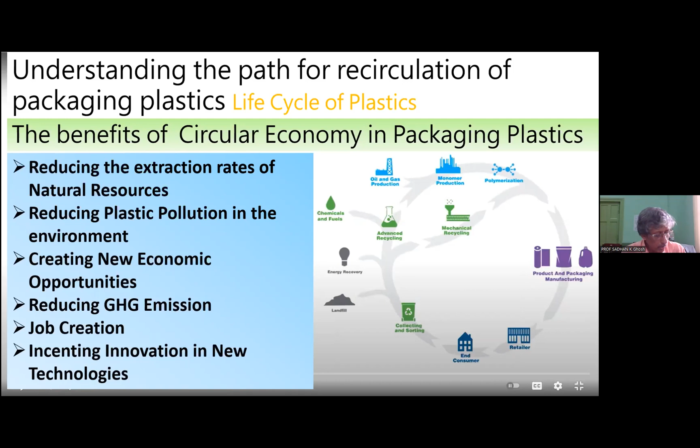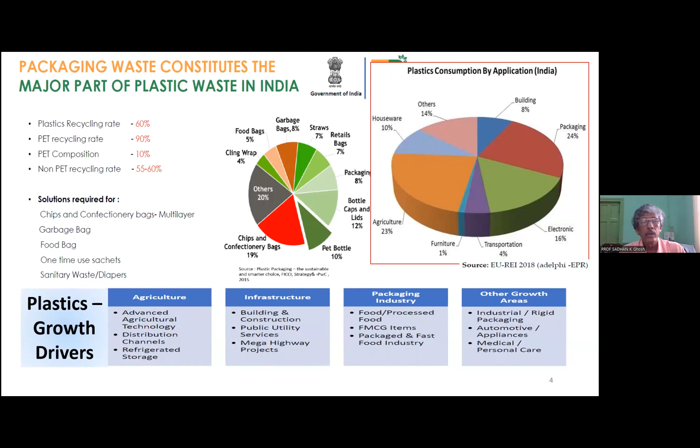But there are a number of solutions which are now taken into practice. And I'll go to some of the technology on which the circular economy is based. I'm not going into the detail of this. This is just a consumption pattern. So plastic is everywhere, and everywhere the packaging plastic is also creating problems because of our habit, because of our culture.

It will identify the materials whose life cycle is longer, conserve all the resources, including energy and material, and ultimately, the disposable material at the end of the life cycle of a particular product acts as a secondary raw material for a second process. Whenever it acts as a secondary raw material, it creates value in the value chain. It is creating product, it is creating economy, and it gives a lot of scope for employment generation, as well as helping environmental sustainability.

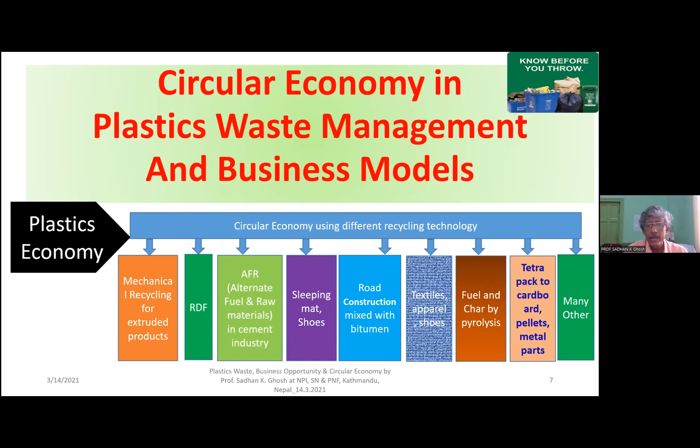Then there are a lot of processes by which we can make sleeping mats, shoes, and many other materials. Road construction, Mr. CRC Mohanty has already referred to. Textile, apparel, shoes, fuel and char by pyrolysis, Tetra Pak to different pellets, and many other processes. This is one process which converts non-recyclable waste into energy, sustainable chemicals, solvent coatings, fuels, and many other things, including methanol and syngas.

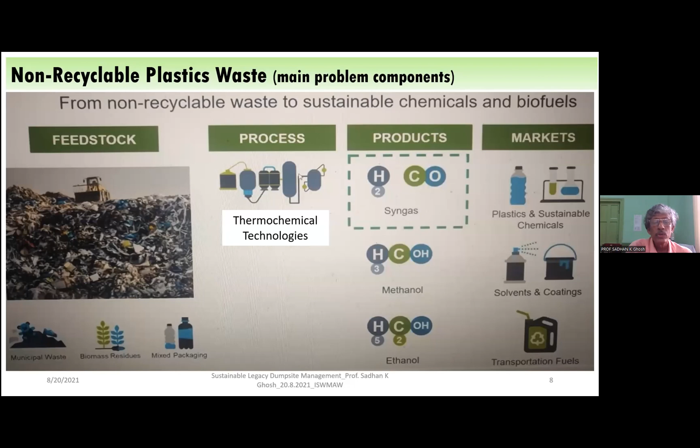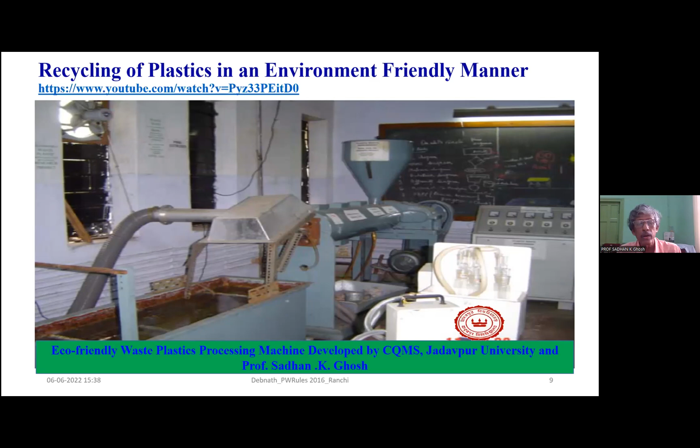So this is another machine. This is an extrusion machine, pyrolysis, plastic extrusion. In fact, this machine was developed by me in 2004, and it is patented. And it is now used in many places. This is an eco-friendly waste plastic processing machine, which takes all the waste packaging plastics and produces beads, and all the gases which are produced here are also converted. So this is the process.

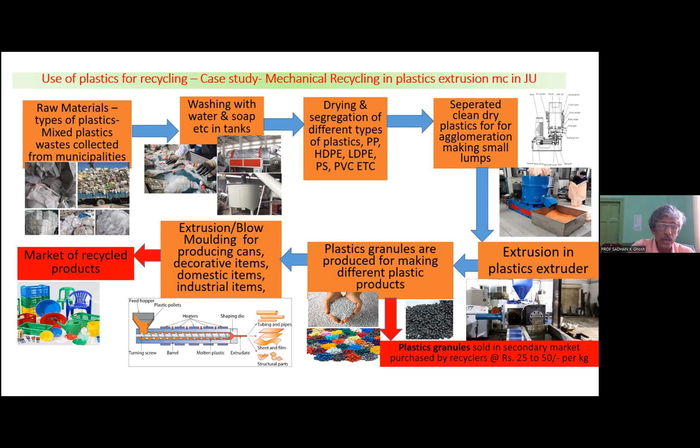I don't have much time to elaborate, but this is the process by which the material is ultimately made into this type of product, which again is used for making different types of end products. These are all marketable products. Even the virgin granules and this waste plastic granules have competitive pricing. In many places, 20%, 30%, 10% of waste plastic beads are used with virgin plastic for reducing the cost of the product.

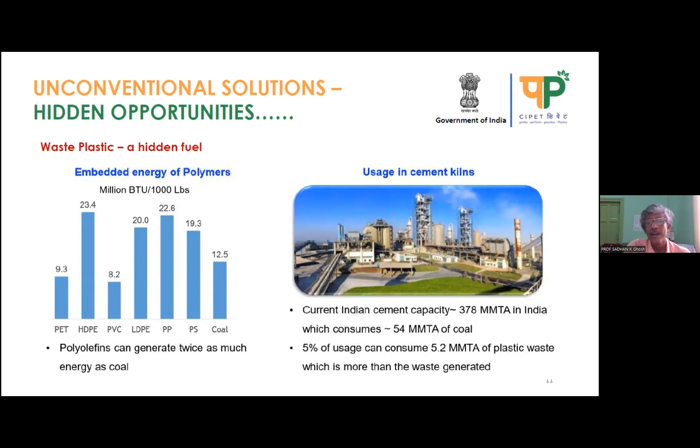This is again the usage in cement plants, the co-processing. The Government of India has taken action that all cement plants will now use plastic and also inert wastes which have a little calorific value. We are still preparing a business model. Of course, there are 60 odd cement plants which are now utilizing this waste for cement kiln utilization, and ultimately they are producing cement, which has a very good market.

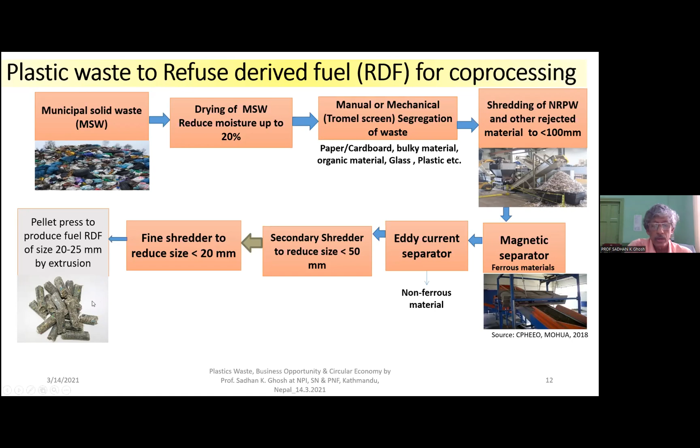Then there is plastic refuse derived fuel, RDF, where plastics are converted into pellets which are again used in a boiler or any other furnace. This has a calorific value of 2,500 to 4,500, comparable to coal and other fuels. Nowadays, the cost of this waste due to RDF production is increasing day by day. These are all very positive developments in the utilization of packaging plastics.

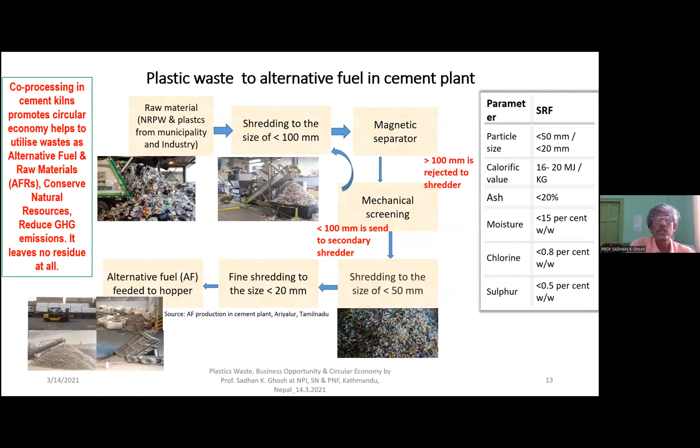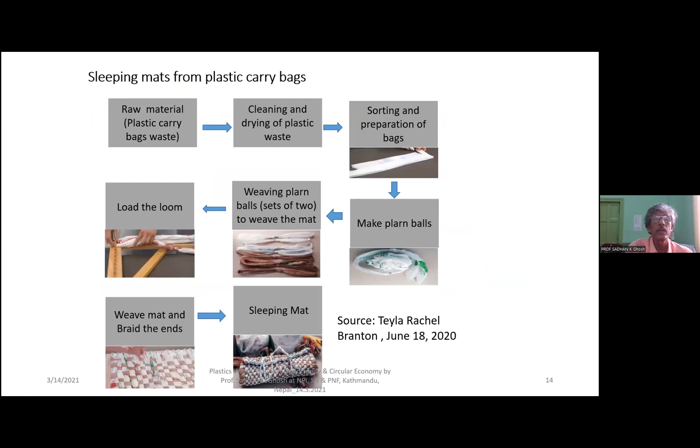As I referred, the cement plant, and this is a sleeping mat. There is a good business in India as well as Thailand for conversion of plastic into sleeping mats, and also different types of dresses and textile products, which are even used in world football or cricket. I remember in 2017, all the players wore this converted textile product as a dress, which was produced as a part from packaging plastic material.

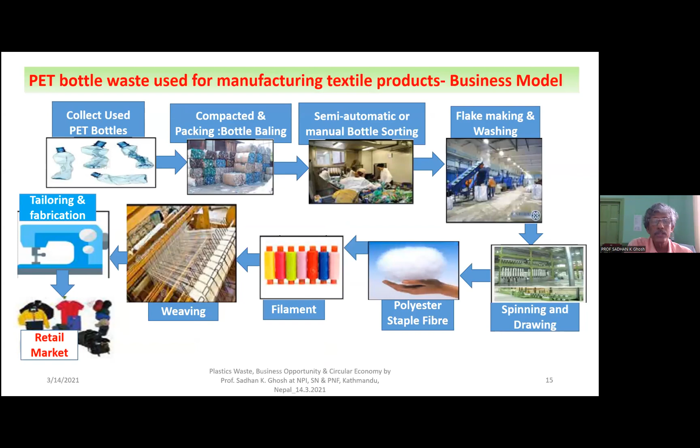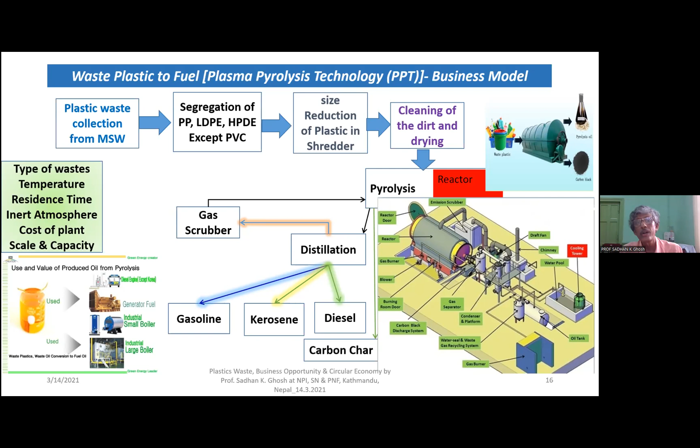So these are some of the very important technologies for utilization of packaging plastics, converting them into usable products, and promoting the circular economy. The circular economy is a very important initiative and concept for utilization of packaging plastics, as well as reducing the problem of disposal of packaging plastics as a post-consumer material.

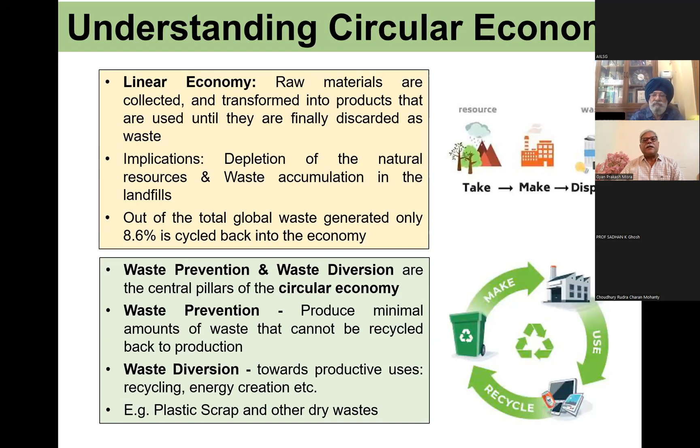Now when we talk of beverage packaging, what is beverage packaging? It is used for a wide range of products such as bottled water, beer, coffee, soft drinks, dairy products, energy drinks, juice, sports drinks, tea, wine, spirits, etc. The requirement of packaging for beverages depends on the required shelf life of the package of the beverage that it is going to contain.

Then there are marketing requirements. Everyone wants their product to be visible in the store, so that when the customer is coming to buy, the product is distinctly visible, and then the customer is prompted to buy that product. So this requirement I term as the marketing requirement. There are also customer needs, application, and safety during transportation, etc. These are a few factors you bear in mind when you decide what kind of packaging material should be used for a particular type of beverage.

Now, talking of marketing requirement, although it was not part of the topic, the government observed that producers of various items were being irresponsible and greedy while designing packaging material for their products. To curb this tendency, the government came out with extended producer responsibility. So in some way, I feel the circular economy concept we are discussing, and extended producer responsibility, are also interlinked.

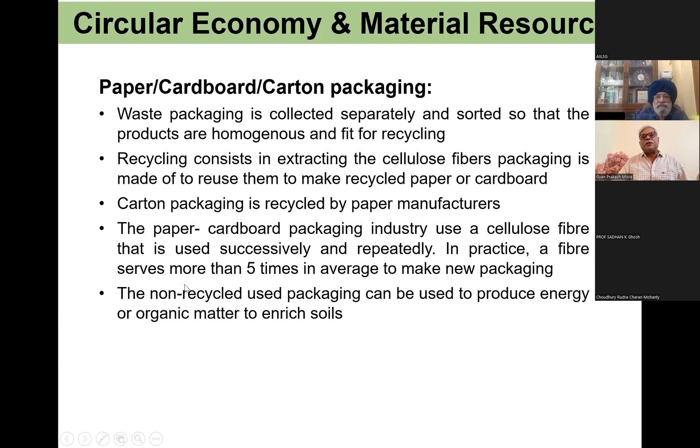For the plastic packaging, I think a lot of technicalities have been covered in the previous presentation, but broadly, to understand, the matter produced by recycled waste meets precise technical specifications to be integrated into new products, including packaging. Plastic producers, packaging manufacturers, packaged products marketers, collectors, and recyclers have been committing for more than 20 years to develop recycling altogether. You can take example of PET bottle.

Over a period of time, take example of mineral water bottles. There has been considerable reduction over time in the weight of the bottle and its cap. Somebody was mentioning to me that it used to be 40 grams per bottle, which has now been reduced to 28 grams per bottle. So this also contributes to your resource management.

Bottles can be made out of PET. PET is a material, as you know. Its environmental impact was reduced by more than 20% in the last 20 years. So constantly these researchers have been making a lot of improvement in these areas. The recycled PET can also be used, wherein 25% on average in bottles containing recycled material. Or you can use biosourced PET, wherein 30% of it is produced with sugarcane. So these are the various methods of dealing with what has been done with respect to the PET bottles.

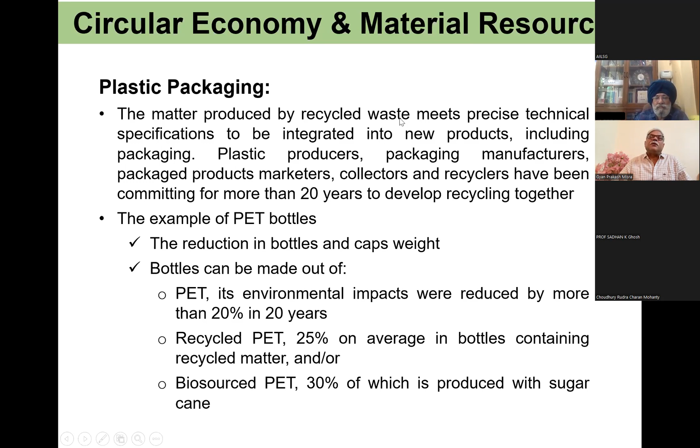Now I will show you a film which will talk about the life cycle of packaging carton. So can you go to the next? Yeah, can you click on the link, please?

In Hong Kong, carton drinks are a part of many people's daily lives, and most people will simply throw away the empty carton after finishing the drink. The production of a carton actually involves a number of stages before it reaches us. We can all play a part in extending its lifespan by recycling, which will help support sustainable development for our society. So how does it work?

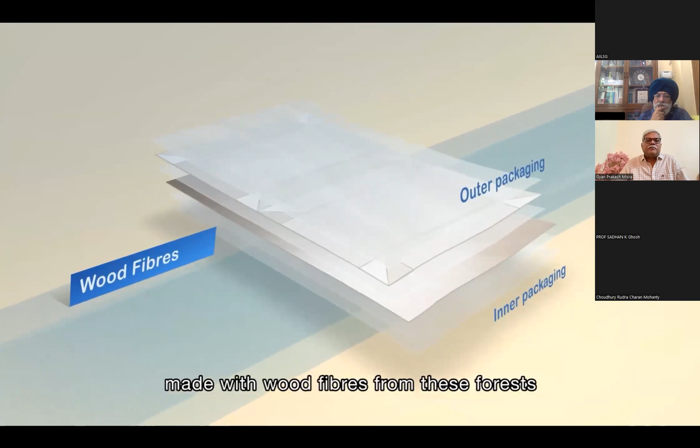Timber from forests that are FSC certified is made into all sorts of products. Tetra Pak, the world's largest beverage carton company, produces cartons using recyclable cardboard made with wood fibers from these forests and laminated with plastic and aluminium. This type of packaging can protect the product from light, air, and dirt.

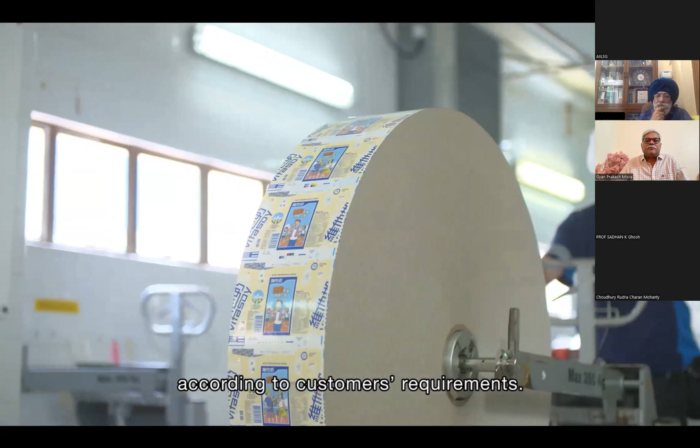Carton suppliers print packaging graphics onto paper rolls according to customers' requirements. These paper rolls are then delivered to customers such as beverage manufacturer Vitasoy. From sourcing raw materials to product formulation and production, beverage manufacturers would adopt the 4R principles to help reduce environmental impacts. The 4Rs are renewing, reducing, recycling, and responsibility.

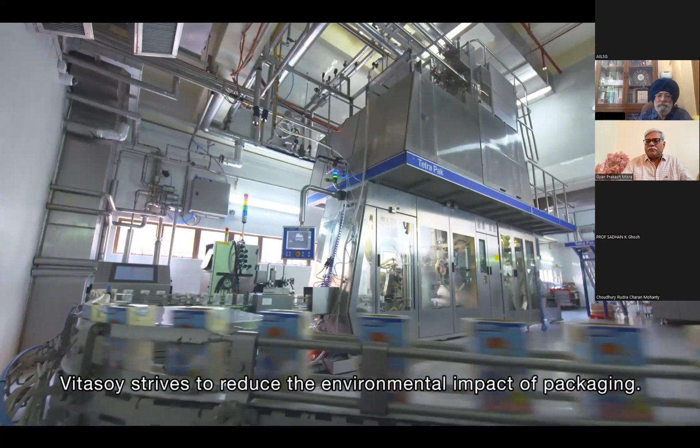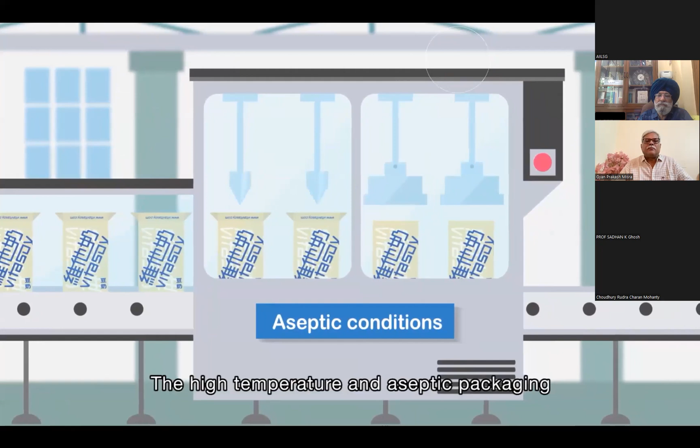Vitasoy strives to reduce the environmental impact of packaging. As mentioned just now, the company has been using cartons made with wood fibers from sustainably managed forests. Vitasoy's products, sterilized in high temperatures for a short time to kill bacteria, are then poured into cartons under aseptic conditions. The high temperature and aseptic packaging protect the product quality and enable a longer shelf life without having to use preservatives.

As consumers, we can help protect the environment after finishing carton drinks by supporting waste carton collection and increasing its recycling value. Here's how we can help. First of all, remove the straw and its sleeve. Then cut a corner off the pack and rinse it well to make sure it's clean. Finally, compress it and put it into a recycle bin specifically for carton collection.

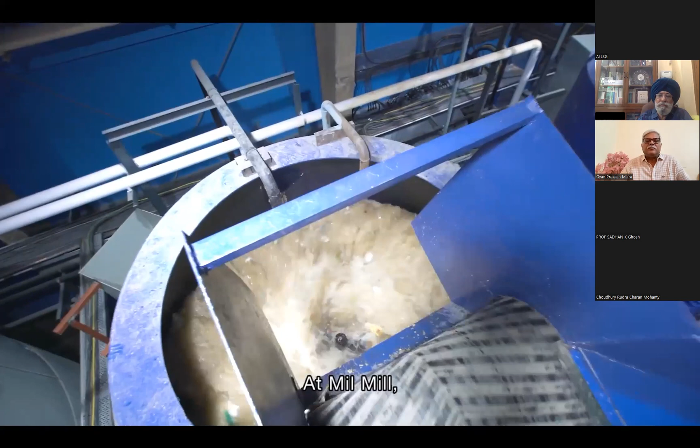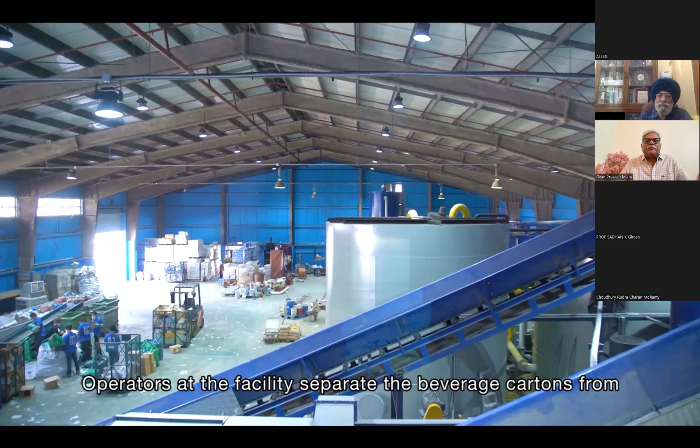The collected cartons will be transported to Mil Mill Recycling Site, Hong Kong's first facility for recycling waste cartons. At Mil Mill, the paper in the waste carton is separated from aluminium and plastic using a hydropulping process. Operators at the facility separate the beverage cartons from other unwanted materials to enhance the quality of the paper pulp.

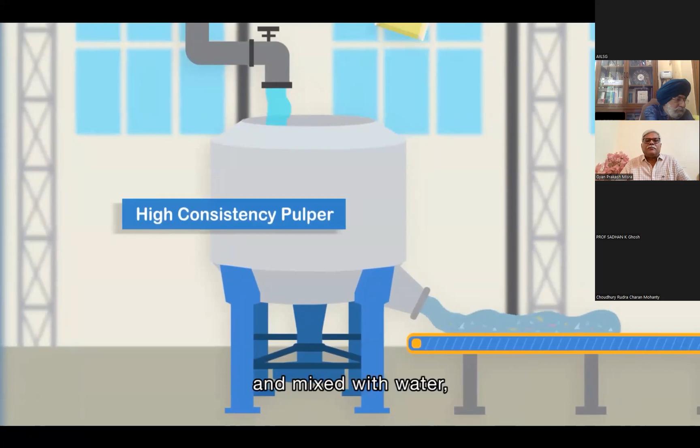Cartons are placed in the high consistency pulper and mixed with water, then passed through a rotary drum to siphon off the carton's aluminium and plastic. The residual impurities are then removed by a separator to produce the paper pulp.

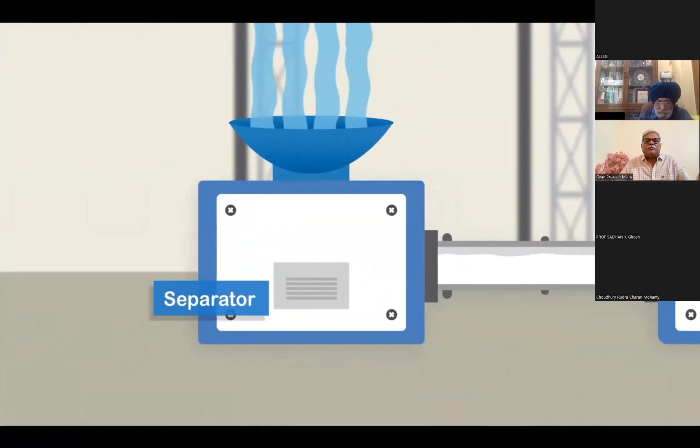We can all help to extend the lifespan of a beverage carton by supporting clean recycling. By doing so, we ensure it can be recycled and help to enhance the value of used cartons. Together, we can play our part in reducing the environmental impact to our planet and enhancing its sustainable development.

Thank you, Dr. Singh, and over to you. Thank you very much, Misra ji. It was wonderful, and I think there are a lot of things to learn. Your video really indicated how better we can collect the used cartons and perhaps increase the percentage share, which at this moment is not even 50% in India, to collect them so that we can really increase that. It was really excellent and we are really thankful. I'm sure that the participants will really benefit from what you have presented and shared. Thank you very much indeed.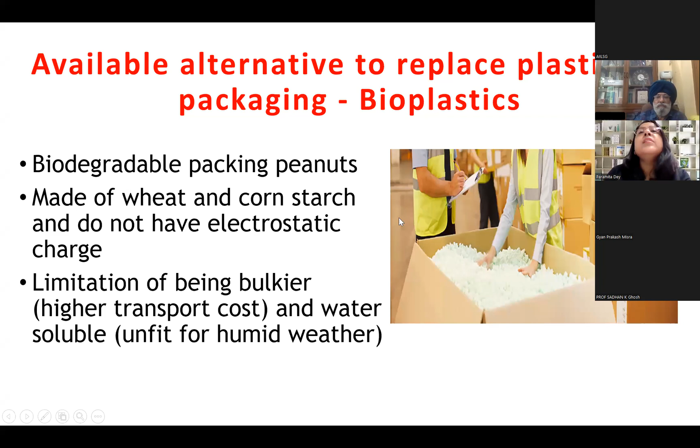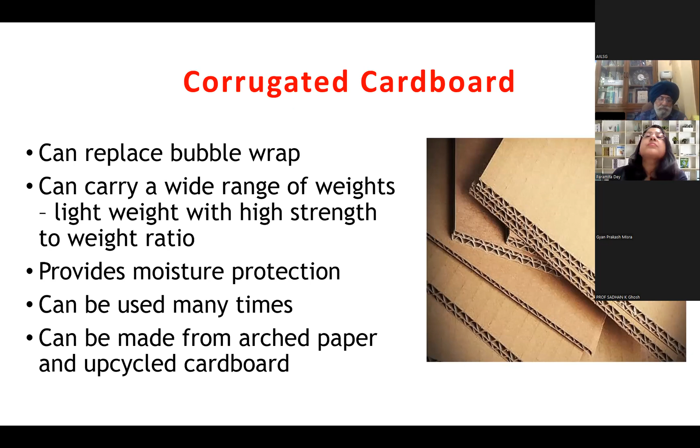Next, please. Corrugated cardboard is another option, but again, there's only a certain number of cycles that it can undergo, but of course it can be upcycled, and it is lightweight with a high strength to weight ratio. Next, please. Another example is that of air pillows made from recycled material. Again, this can be recycled. It has a little bit of plastic, but it is very environmentally friendly compared to many other options. The other option is that, next please,

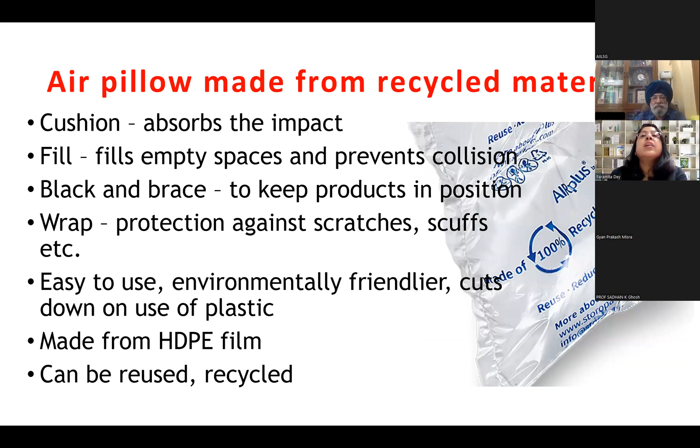And it's also an example of industrial symbiosis, where the waste of one industry is becoming the raw material of another industry. So this has a lot of opportunities going forward, but of course, a lot of research needs to be done in terms of upscaling this whole thing, because farming also requires a lot of land. Next, please.

The next one is seaweed packaging. Seaweed is a complex alga, and there are small scale efforts which are being researched for packaging of dry food products. And it is also ensuring green jobs and entrepreneurship at a small scale, in terms of small scale industries. But one can think of doing these options depending on the kind of products we are looking at. Organic fiber is another option that we have all seen, and in India it is widely used. Next, please.

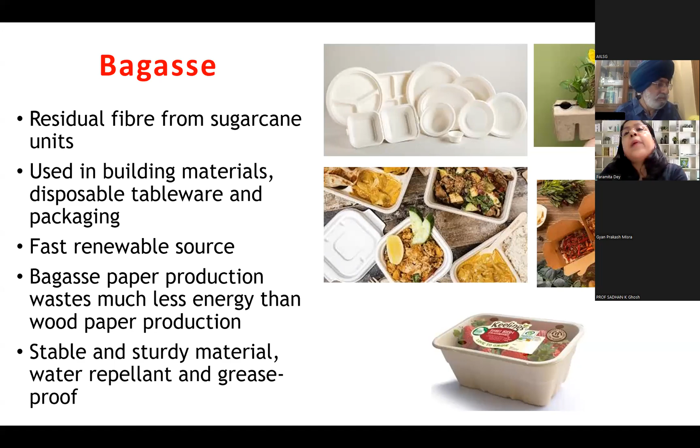Bagasse is a very promising material because a lot of sugarcane is produced, and it's a stable and sturdy material. It's water resistant, water repellent, and it's also grease proof. And it is being used to make a lot of other things; it is being used very widely to package food products. Next, please.

Stone paper is again an example of industrial symbiosis. It's made of calcium carbonate, where HDPE plastic is being used with 80% of stone, which is basically lime powder, and it's a waste from the quarries. And India has a lot of such quarries. And here it is used for making paper bags, takeaway food cartons, Ziploc bags, and things like these. Next, please.

Palm leaf is again biodegradable, very environmentally friendly, but it has its limitations in terms of the kind of products it can be packaged in. Next, please. So these are some of the options that are being researched upon, that are being looked at.

So as a conclusion, I would like to say that packaging is necessary, and recycling of packaging material is a very important recovery route. But there are some practical limitations to recycling. Paper fiber deteriorates each time it is recycled, so the realistic life of a paper is around 5 to 7 cycles. Some materials such as cement sacks require only virgin fiber to get the required strength.

Recycled polymers lose their properties each time they're recycled. Glass can be infinitely recycled, but the colored ones cannot be used to make clear bottles. Metals also have the capacity of being recycled infinitely. So the most practical thing to do is to optimize the recycled content and support the development of new and innovative materials. We all know the advantages of plastic.

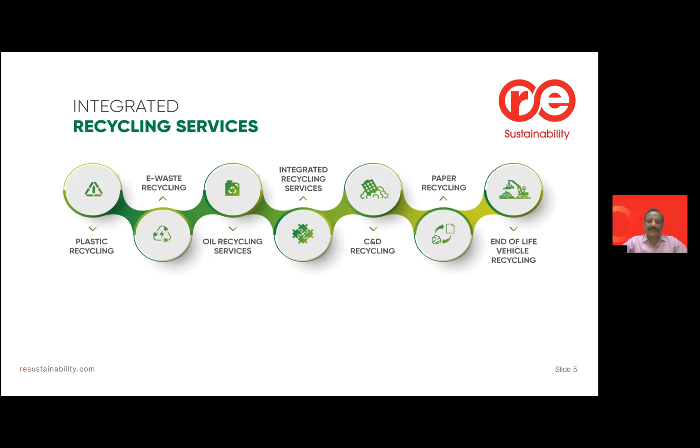The focus is completely on how we can together come out with a circular economy, so that everything which is brought out from nature can be given back to nature with minimal going to waste. Next. It is working with a closed loop. We provide and handle right from collection, the collection of the segregated material in the way it should be, so that there is the minimum requirement of any further resource, whether it is manpower or any other material resource. It depends upon how best it is collected, how best it is processed, and post-processing how the material can be supplied back as various different products, in line with the different regulations. Next.

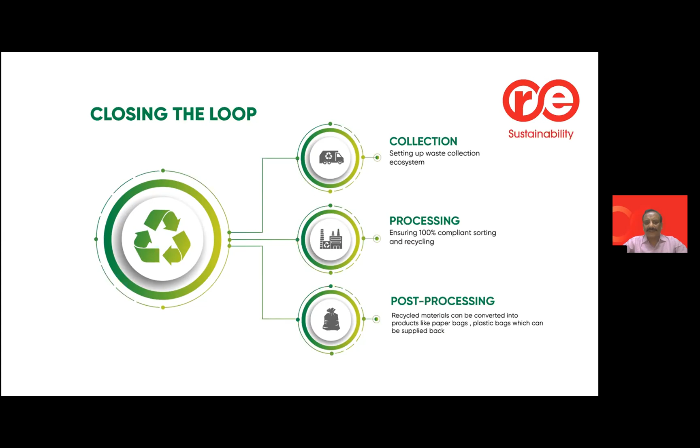So from the municipal solid waste, it is collected from households for door-to-door collection, and it goes to the material recovery facility. At the material recovery facility, the various types of waste, whether it is plastic, paper, metals, or wood, gets segregated into different fractions where they go for different value addition, whether in the form of recycled paper, plastic granules, recycled metal, or recycled wood.

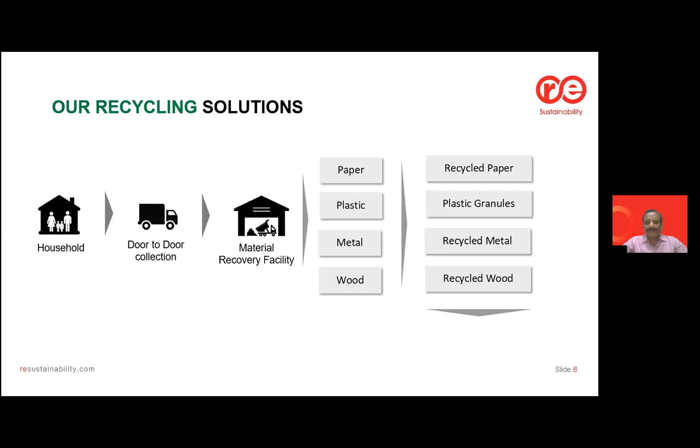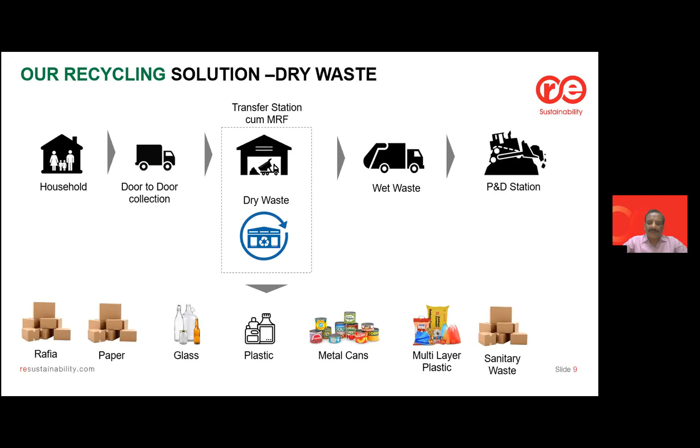Upon the paper waste, to be very precise, it goes through collection from different generators, transportation to the baling facility, and from the baling facility, it goes to different recycling options, recycling treatment plants.

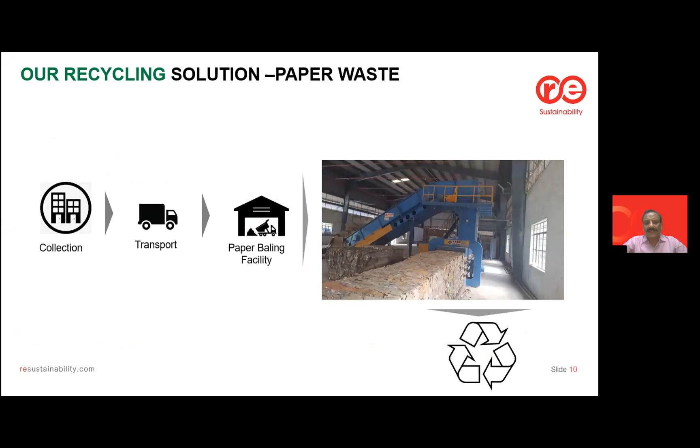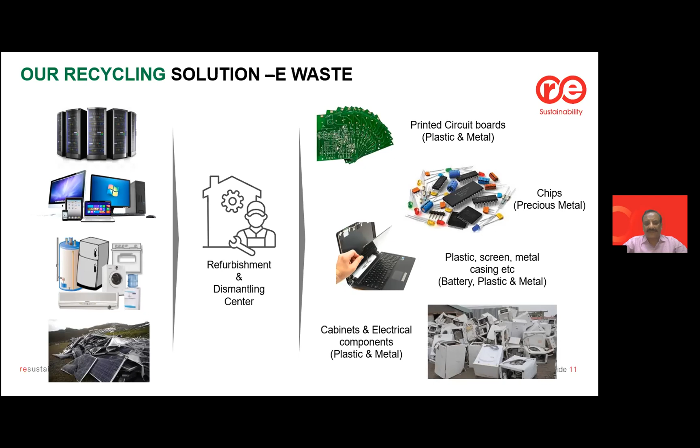Similar is the case for e-waste. I will not go into too much detail, but these are the infrastructures being provided, right from refurbishing to dismantling centers. I would also like to tell this august audience that India is going to have the third largest recycling facility for e-waste, apart from Belgium and China. We are going to have it in Hyderabad, and the plant is under 70% construction. Hopefully by next June, or World Environment Day, we will be in a position to run that e-waste recycling facility, which is a metal recovery or material recovery facility, for precious metal recovery.

For plastic waste, it goes from the MRF - certain waste plastics, which my senior colleague Mr. Gyan Prakash was talking about, goes to the waste-to-energy plant, from where clean energy can be produced, and bottom ash treatment can go to recovery through tiles. Again, through pyrolysis, certain gas can come up, and other things like recovery of plastic granules can go to manufacturing of other plastic material.

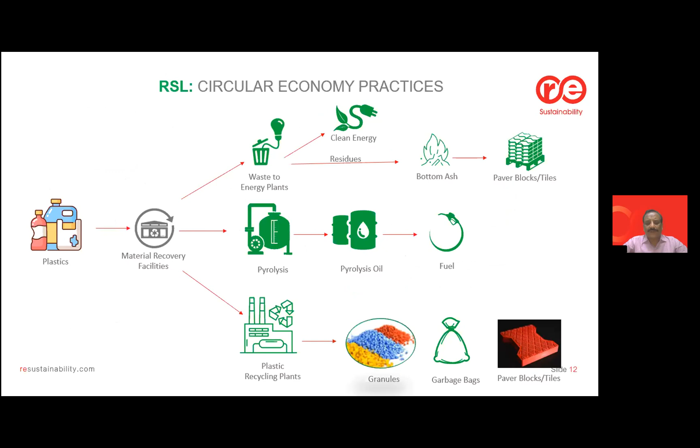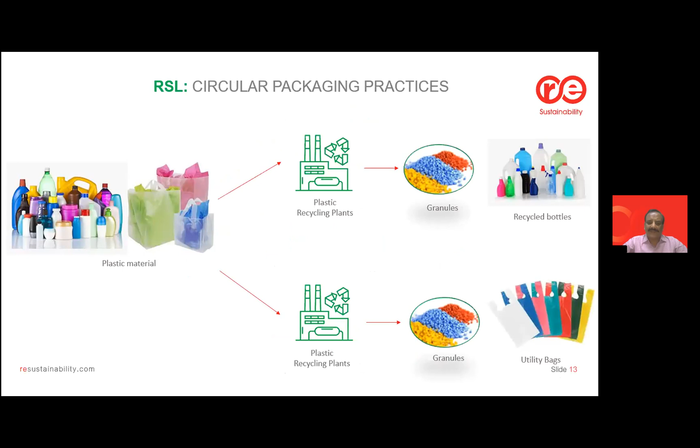Packaging material goes to plastic recycling plants in the form of granules, either coming up through recycled bottles, or we are manufacturing utility bags. These utility bags are also being given back to the generators of municipal solid waste, or even to biomedical waste, where the waste is getting segregated. And this is all happening within our country, within our facilities at Hyderabad.

We are also launching, and putting into practice - without technology, things cannot come up. So it's called Reloop, a digital platform wherein every material entering your facility gets tracked: where it goes, how it gets processed, what value addition it has, and how it gets back to the market, all tracked through this technological intervention, now called Reloop.

It tracks everything, right from collection, handling, weighment, segregation, decontamination, processing, and value addition. Every product, at every level, is tracked through a specific barcode, getting updated to the tab, and through the tab it goes to senior management to see how the material, whether it is the material receipt at the site, is returned back in a proper manner - not just to say that it should go anywhere. So it is not only in the form of environment regulations, but also in terms of value addition, whether the loop is getting closed or not.

All are QR code based and tracked and traced at every level. I've already explained this.

World-class infrastructure is available in India. What we see in other countries is equivalent to what we have in India, whether it is treatment facilities, monitoring and command control centers, or plastic recycling facilities. Every product is being tracked, every product is being traced, and what kind of consumption of electricity and water, and what kind of products or byproducts are coming, whether the material coming out as effluent is being treated or not - each and everything is being tracked and converted into useful material.

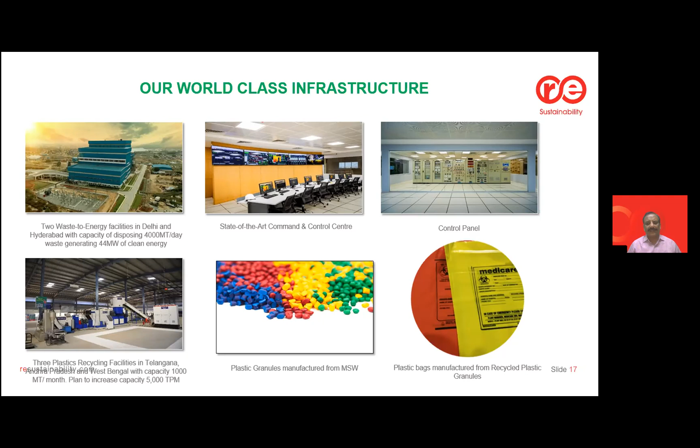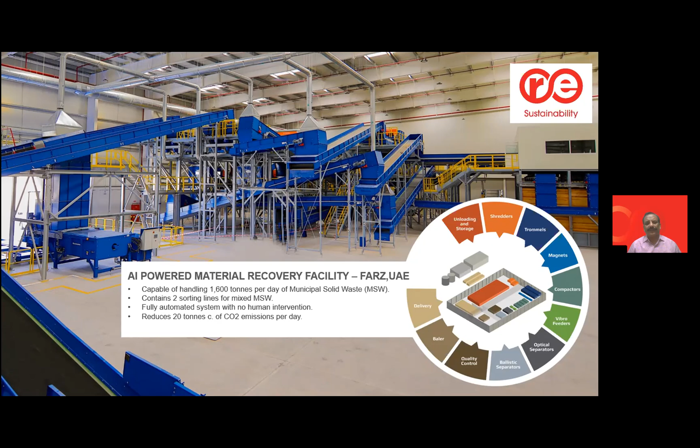With that, I leave open the floor, and I thank the organizers, especially Kulwant sir, for inviting us for this august event. Thank you, sir.

Thank you, Sanjeev ji. I happened to visit your plant in Delhi. It was Ramky, it was still known as Ramky Enviro Engineers Limited. They had just installed that, and I visited along with a team of, if I may say so, municipal engineers from Haryana and some other states. It was really wonderful, very impressive. And what you have shown today, I strongly feel that we in India can really see a brighter future in terms of circularity, in terms of better waste management. Re Sustainability is doing wonderful work. I am very sure many others will also come up so that we are able to manage our waste in the country significantly. Thank you so much.

I was very happy, in fact you have covered larger ground. We were very keen to have a person with this kind of Central Pollution Control Board background basically, and you have really summed up everything with that. Thank you so much, I appreciate that.

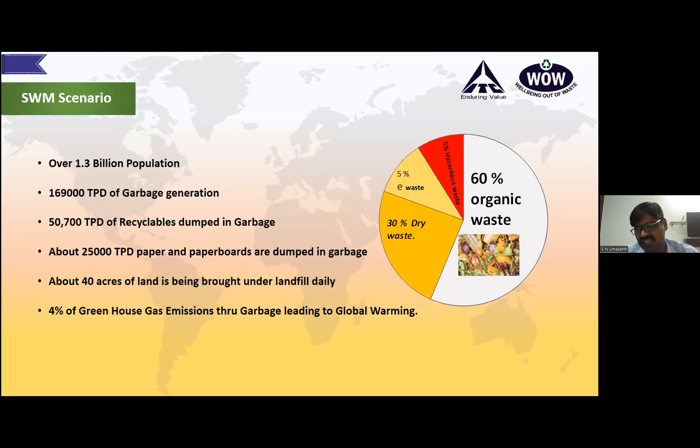Since we are from a paper company, we'd like to share some facts about paper. India produces about 18 million tons of paper and paperboards per annum. Unfortunately, only about 5 to 6 million metric tons of paper and paperboards is being recovered, that is newspapers, magazines, notebooks, and textbooks. So a lot of dry, good recyclables end up in landfill through the garbage route.

India imports about 6 million tons of waste paper at about $2 billion. That means we are importing the garbage and paying the foreign exchange. 50% of the dry waste generated is paper and paperboards, and paper consumption is growing at 10% per annum.

Coming to beverage cartons, consumption in India is about 90,000 metric tons per annum, growing at 12% per annum. Only about 40% of beverage cartons are recovered and recycled. The major challenge in beverage carton recovery is source segregation, because source segregation doesn't happen, so these beverage cartons also end up in the garbage.

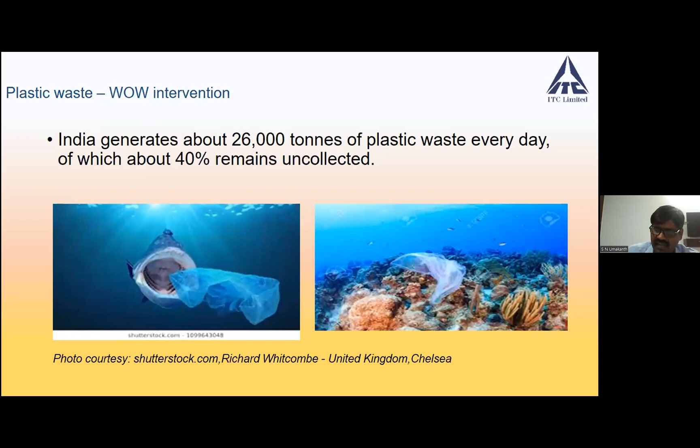Tissue usage is also expected to increase, with current growth around 20% per annum. And about plastics, India generates about 26,000 tons of plastic every day, of which about 40% remains uncollected. You can see how marine litter is happening.

These are the present scenario. The current waste management: wet and dry is mixed and handed over to the waste collector or dumped at the nearest dumper bay. From there it goes to transfer stations, and from transfer stations it ends up in the landfills. You can see tons of garbage lying at landfills in India, and these are untreated, and cannot be processed unless the waste is segregated.

Certain technologies have come now, like biomining, capping, and all, but again these are all expensive and a waste of resources. So underground water is polluted, and air is also polluted due to these landfills.

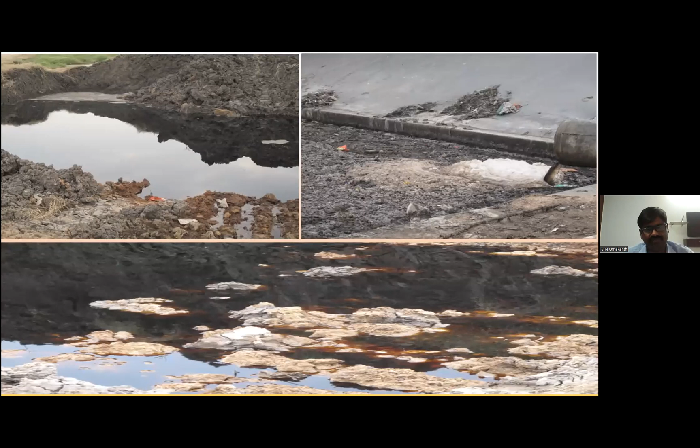You can see this leachate which comes out. The leachate gets treated at sanitary landfill sites, but in rainy seasons it's very tough to treat. The water that comes out of this garbage goes untreated and percolates into the underground water belt.

Coming to the informal sector, whatever dry waste or high value waste is picked up by the waste collector is again sold to some kabadiwala, and from kabadiwala it goes to the aggregators. You can see how they handle it. Child labor is involved, a very unhealthy livelihood, but they are doing a tremendous, humongous job. But this is not the way we think it should be done.

So coming to WOW, what is the solution we have? This is a problem, but we have a solution, that is WOW. The main objective of WOW is to inculcate the habit of source segregation among citizens, recover valuable dry recyclable waste and channelize it for recycling, create sustainable livelihoods for waste handlers, develop social entrepreneurship and create green jobs, and create a Swachh Bharat and Atmanirbhar Bharat.

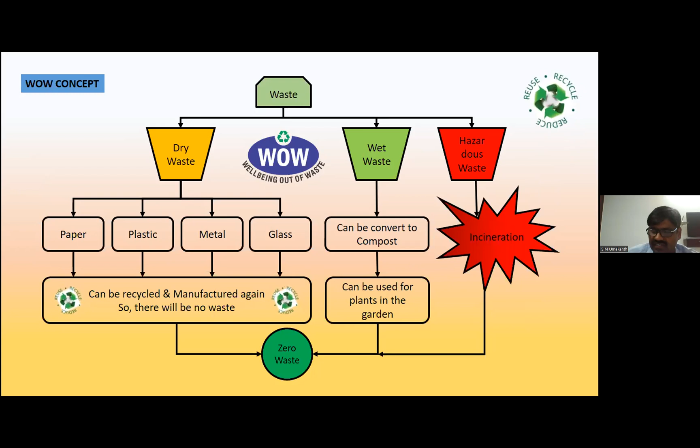So our WOW model, where the ITC funds NGOs, first identifies the NGO and funds the NGO, so that NGO ties up with the municipal corporations, enters into an MOU, and works with all the key stakeholders like waste collectors, citizens, households, schools, corporates, educational institutions, colleges, etc.

It has a team, it will recruit a team where the propagation executives go door to door and educate on source segregation, and also the community resource persons. These community resource persons are identified from each and every ward of the municipality, and they are picked up especially from self-help groups, and trained, and given responsibility. They act as WOW ambassadors in their ward and ensure segregation at the ward level.

So the same community resource persons, if they are interested, we give them the operations of dry resource collection centers, where all the dry waste which waste collectors collect separately comes over. Again, they have to buy this dry waste from the waste collectors and further process it and channelize it for recycling.

Here you have to see that the dry resource centers are very key. At the collection site, waste collectors are very key, and the dry resource collection center is an infrastructure created to collect all this dry waste and further value add - further sorting, baling will happen there, and all the material will be channelized for recycling.

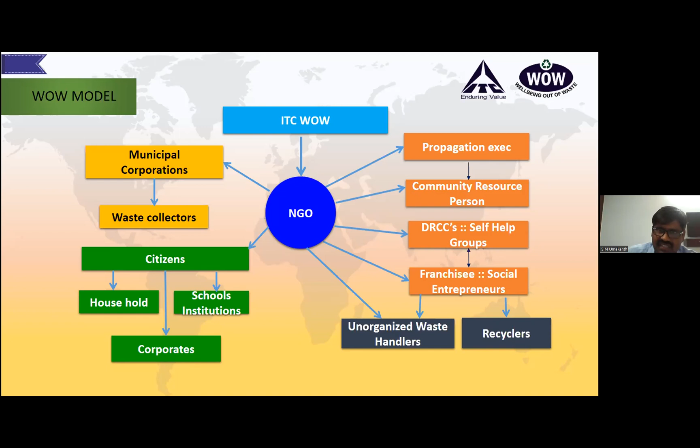These centers are operated by self-help group women. And sometimes these centers will send the material to centralized central hubs, and from there it goes for recycling. These central hubs again are operated by startups and social entrepreneurs. This is the current model we have adopted, and we are working in 8 states in India.

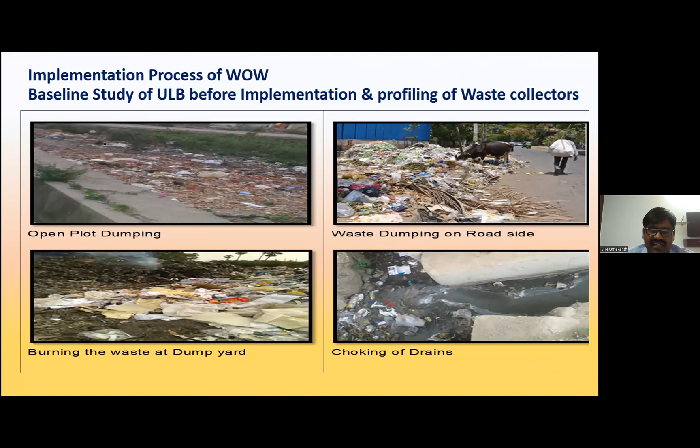So the implementation process is that before we implement our program in any city, we do a baseline study and profiling of all the waste collectors and the current scenario of waste management in that city. Then we enter into an MOU and launch the program by inviting all the public representatives, MLAs, corporators, concerned ministers and all, launching the program in that particular city.

Once we launch the program, we identify these community resource persons and propagation executives, and train them on solid waste management and communication skills - how to communicate to households, and give a live demo on source segregation of waste: what is wet waste, what is dry waste, what is hazardous waste, and why segregation should happen, and what is the impact and importance of segregation. This is imparted to these community resource persons, who are the ambassadors and paid volunteers for the ITC WOW program.

So these kinds of confusions are avoided, and it's explained how the waste has to be handled and disposed of, and what kind of bins they should have - for dry waste a bag, and for wet waste a green bin. They're also told how to do home level composting, and sensitized on waste management, especially on why segregation matters.